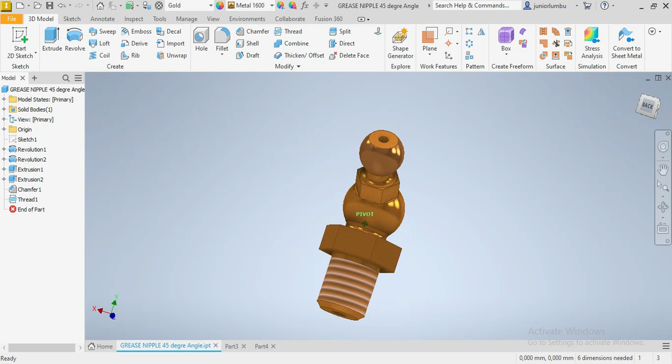So in this video, I'm going to give you an idea on how to tackle this kind of drawing. First, since our dimensions are in millimeters, I'll go to New, Metric Standards, Millimeter, and then select Create.

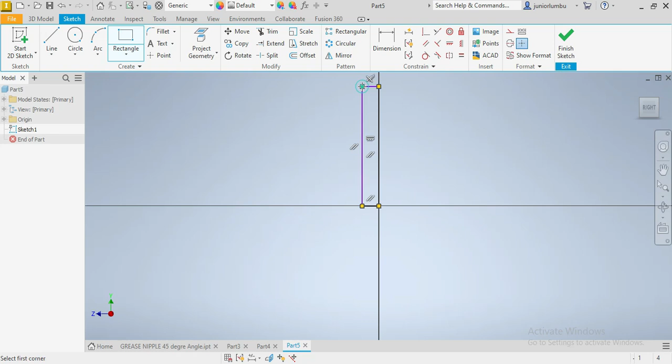Here we are going to start with our rectangle, from there up to there. This one here needs to have a dimension of 24.2. First, the second rectangle needs to come from there to there.

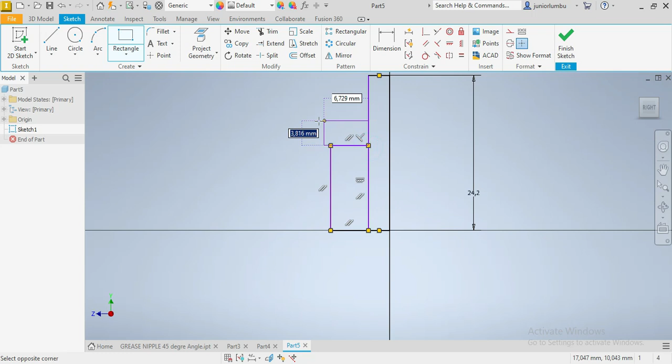The third one from there to there. We need 5 millimeters between these two. We need 16 millimeters between these ones.

Now we need, from there to there, we need 5 millimeters as well. From here to here, we need 3.5.

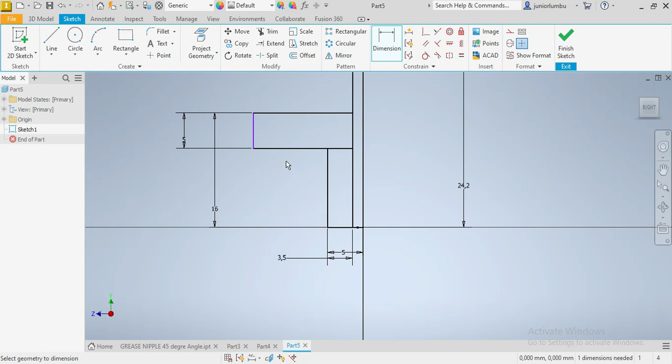From here to there, we need 8 millimeters. Okay, now that we have this, the next thing that we need to draw now is a circle.

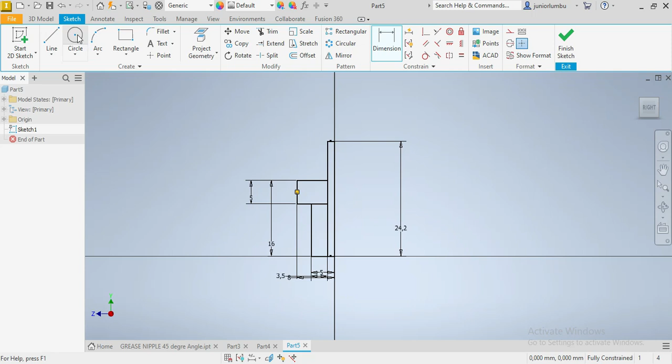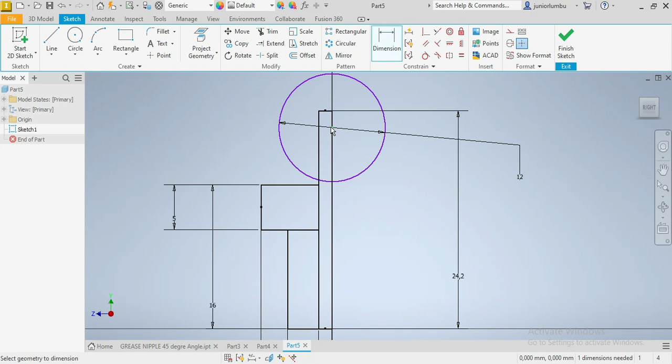So our circle is from there to there, and this one here needs to be 12 millimeters. So the diameter is 12 millimeters. We need now from that point to the sole of our drawing to be 22.

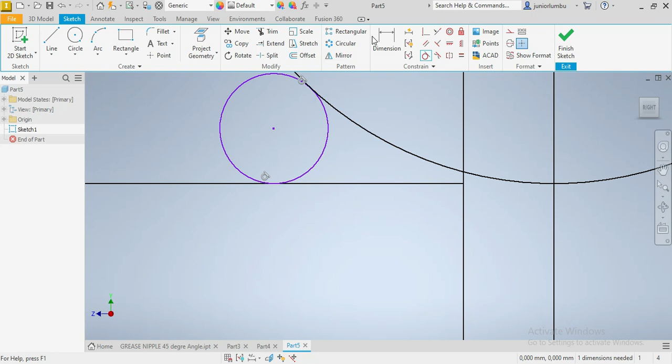Now we need this small circle here. We need to make sure that it is tangent to that one, tangent to this one. Its dimension needs to be 2.2 millimeters. After that, we're going to go now for our second axis.

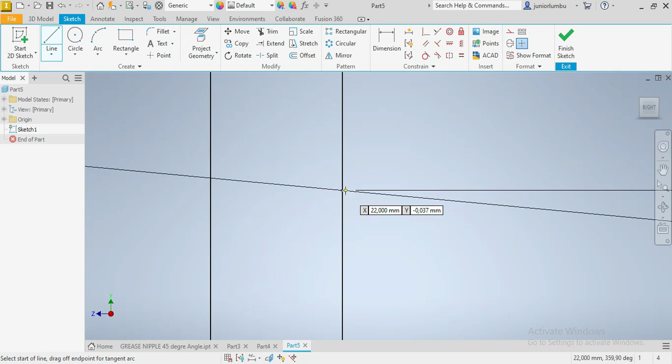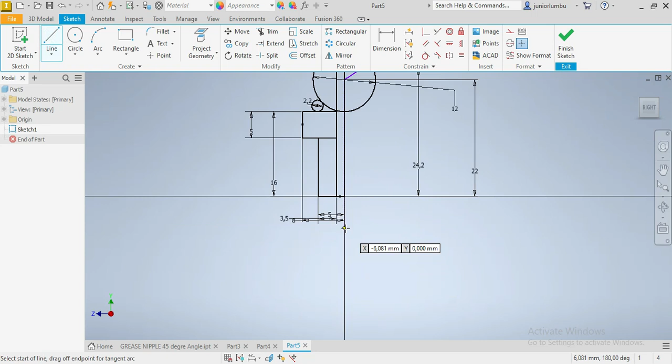It will start from here, our drawing point of the circle. There we go. We need to make sure that the deviation between that one and—hold on a second, I need to draw my first axis. Seems like it has disappeared.

No worry about that one. Okay, there you go. So we need to make sure that the deviation between my first and second axis is 45 degrees.

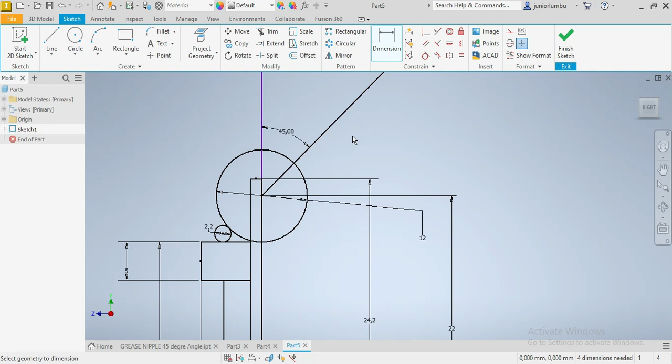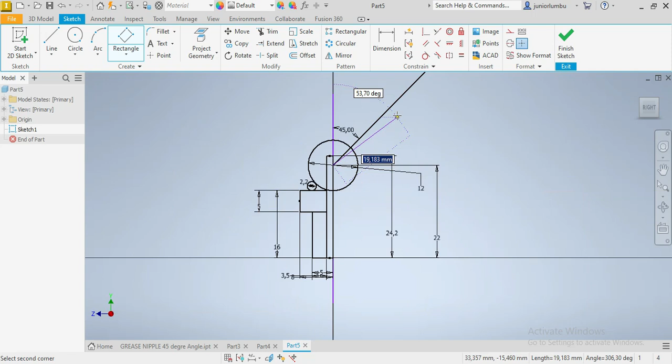Now that I have that in place, the next thing that I need now is my first rectangle. So it's going to start from here, okay, from there up to, let's say, there. There it is.

This is creating the pathway of our grease, while lubricating. So there we go, it's a 1 millimeter diameter path.

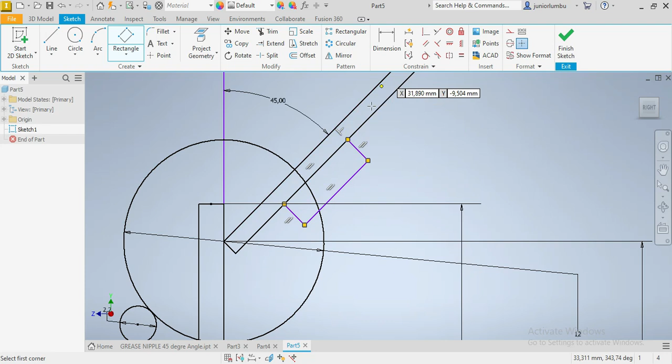Then we're going to go for the second rectangle. So the second one, we start, let's say, from here to there. And we need now this line here to help us give a better design to our drawing.

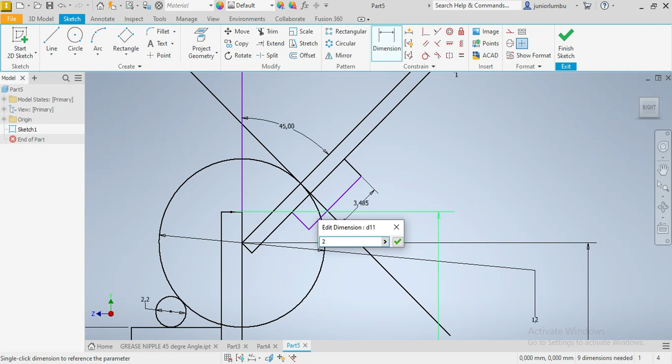Now we need to make sure that this one is parallel to that one. Again, we need to make sure that it's tangent to this circle. Now that we've done those, from there to here we need to have 2 millimeters.

The dimension between this one here and that one there—come on, not there, hold on a second, escape there. So the dimension between this one and that one needs to be 4.5.

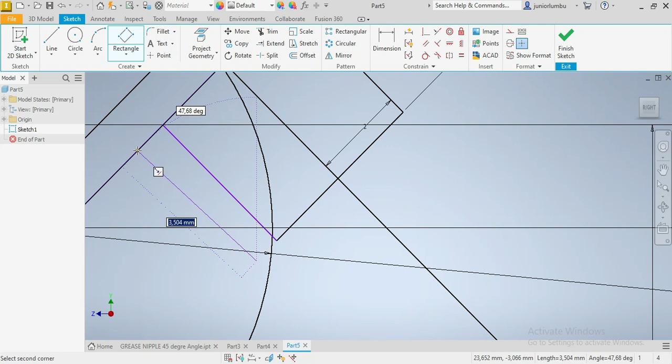At the same time, I need to make sure that this one is covered. So to avoid what I'm seeing there, I need to do this: just start from there, then touch there, then go there. So to avoid this, because I'm seeing that something's wrong there.

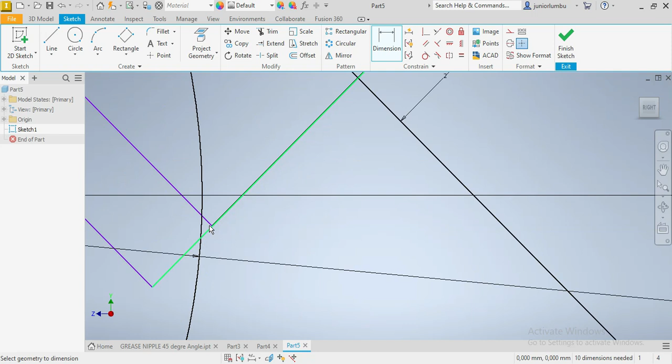So this one here needs to be parallel to this one. And from here to there, I need to have 2. Don't worry about this, just like I'm seeing that my first rectangle is shorter down here. Can you see that? All right, so let's carry on.

Now that I have that one in place, the next thing that I'm going to do is draw my third circle. It's going to go like this. And this one here needs to be 9 millimeters. So 9 it is.

From here to there, I need to have 12 millimeters. So 12 it is. Good, okay.

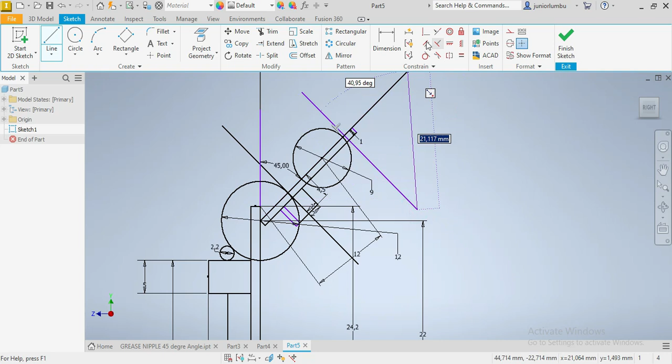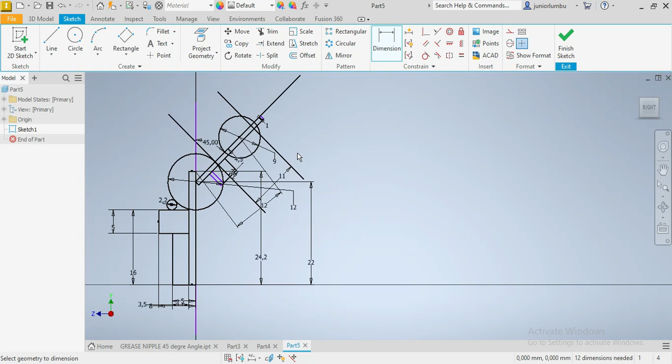Making sure about this thing now, I'm gonna draw my other line here. Again, this is to allow a better design, to give a better shape to our drawing. So this is parallel. Now the dimension between this one and that one needs to be 11. So that needs to be 11.

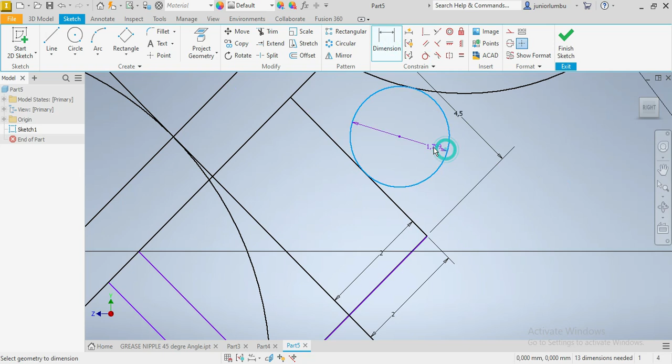11 it is. Now that I have this, you need to follow this properly. I'm going to go for my fourth circle. I'm gonna put it here. This one needs to be tangent to that, and at the same time tangent to this one. Then it has to be 2.5 millimeters.

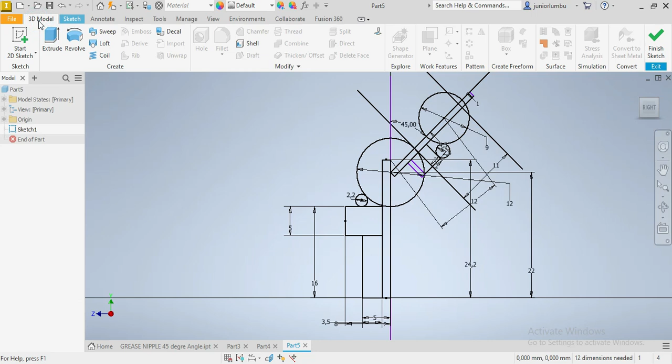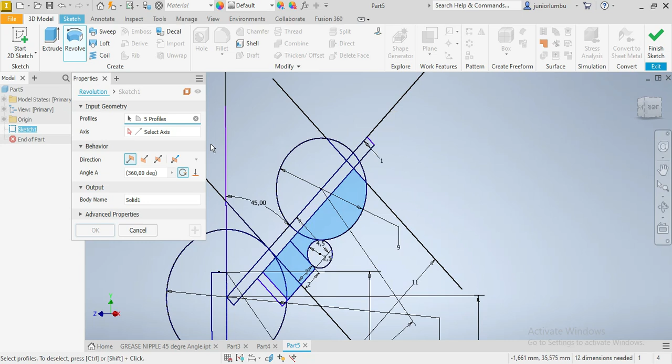2.5 it is. So now that you have this in place, look at how you're going to finish up your drawing. You go on 3D model, click on revolve. Now you come here, start with this part. You need to revolve that, and this. I need to revolve the whole thing against your axis, this axis. There it is. And then you say okay, or plus.

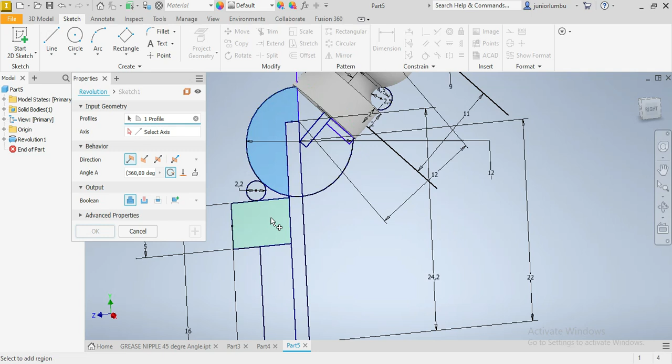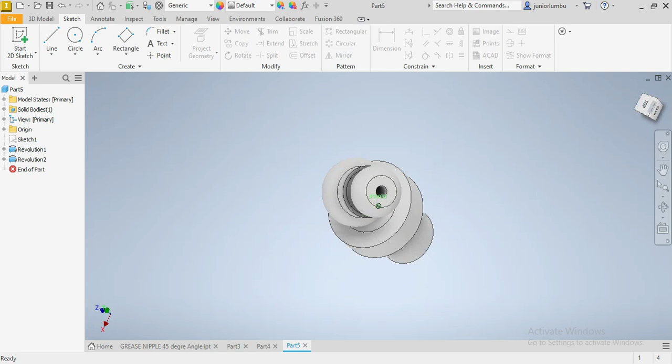Now you need to revolve this and that, and this against that axis. You say okay. Now you have the shape of your grease nipple. You have this one there, you have that one there. However, you are not done yet.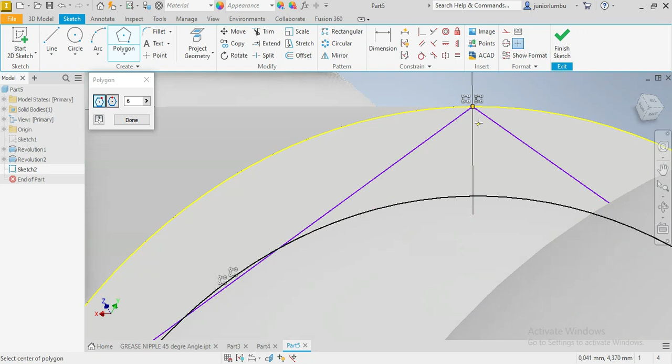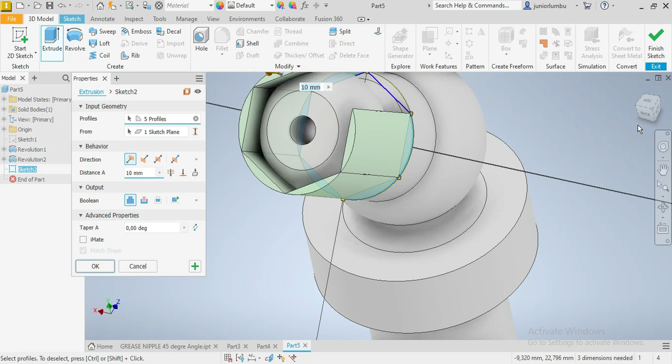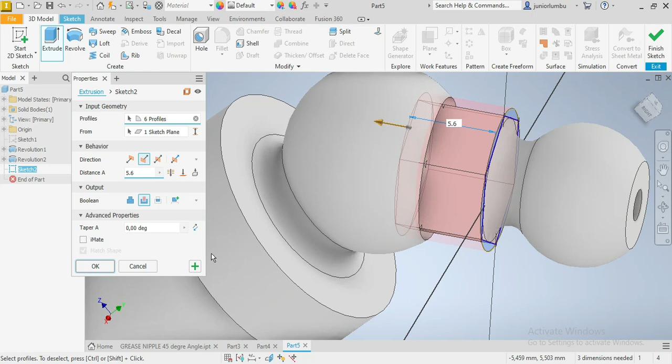Once you have that one, you go on 3D model, click on extrude. Now you need to extrude that part, this part, that one, this one, this one, the other way around. You need, I think, 6, no that's too much, 5.6, 4.6 - do you see how it is? You can do it together. Nope. 4.1. It's in. Good, so you say okay.

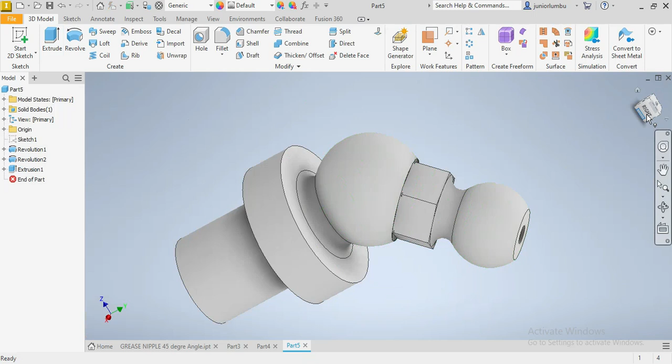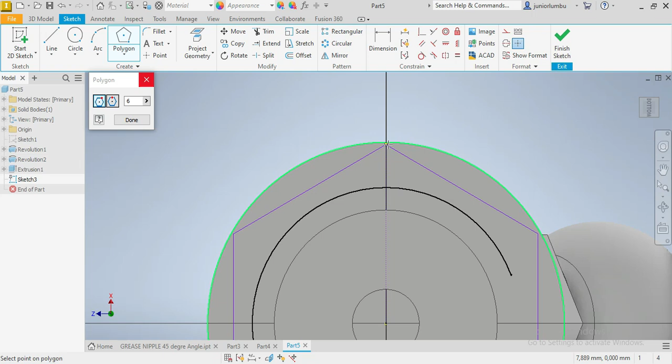So there it is. Now, after that, what you're gonna do next is come here again. You say new sketch, polygon again. You start there, and then you make sure it goes up to there. Good, as you can see, again you go on 3D model, click on extrude, you need to cut.

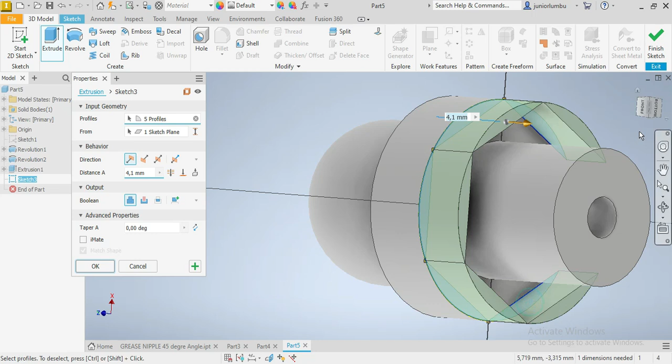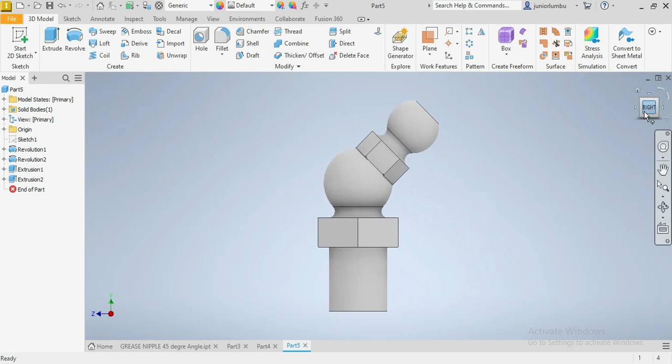That part, this one, this one, that one, that one, and this one here. The other way here, I think it's 6. Let's see, 6 is fine. So we say okay, we have this now. What we're gonna do is come here and put our chamfer there. So there we go. I think one will be okay. Say okay.

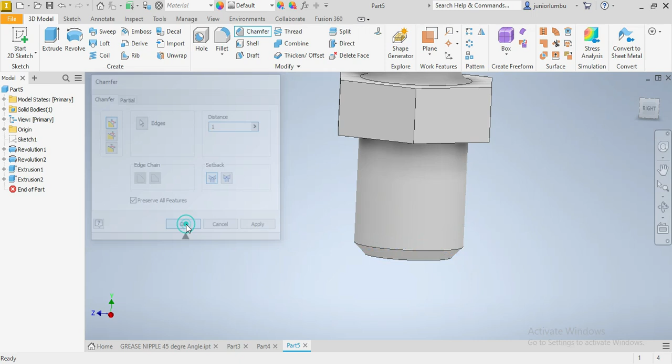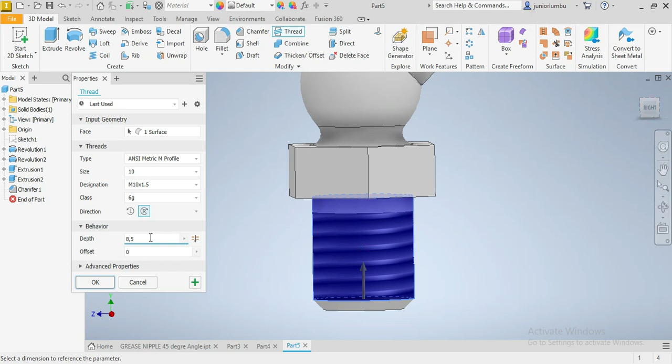Now we need to put our threads. While we are putting our threads, we need to make sure that this one here goes up to 9. So we need to have that offset of 1 millimeter there. You can even put it 8.5, okay, or you can put it 9. Then you say okay, so now you have your grease nipple designed.

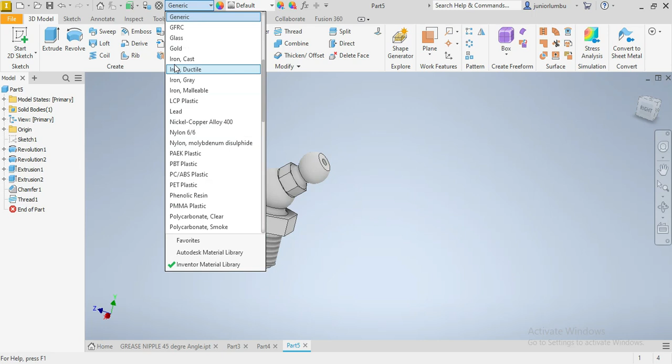The next thing that you need is to give the material. So you're gonna come here. I'm gonna give it gold. Then this is how it looks like.